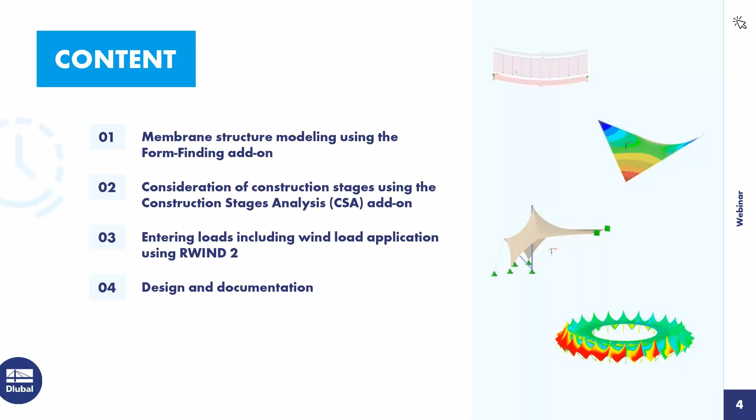Okay, thank you, Andreas. Then I take over and start with the technical part of our webinar. Today I want to show you how we can deal with membrane structures in our new generation, RFEM 6. For this we planned 4 main points we want to show you.

At first, of course, how you can model form-found shapes and work with them in the program. Then how we can organize these shapes to each other with stages. Third, how we can create wind loads according to CFD analysis on the structure. And finally, how you can design and document such type of structures.

Of course I can't do this completely for one project in an hour, but I want to give you an idea how this is working. You see on the right side some pictures from top to bottom.

Because the new generation has a new input concept for these tools, I want to explain this on an easy, simple example on a cable at first. Then we go to a hypersail surface structure, and afterwards we use all these functions I explained on a more complex structure, a stadium segment, and finally we take care of wind simulation on the complete stadium model, what you see on the bottom.

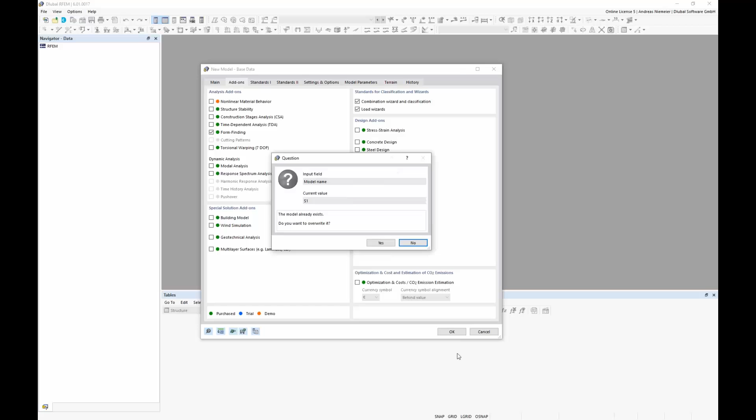For this first part, we define a new model and activate the so-called form finding tools in the add-ons catalog here. We want to overwrite, and as you can see if you go into the program, it looks generally like the past solution, but as you will see, we have some new changes here.

As mentioned, we will explain all new features on a small, easy example. I selected here a cable example, therefore let's model it. I use a new member type, cable, with a cable cross section.

Let's select one from the library, for example this PE cable with a PE material, cable material with the equivalent stiffness, and define here a cable with the length of 10 meters between 2 points. So that the cable will not fly through the air, of course we have to define some boundary conditions, therefore I define here 2 supports.

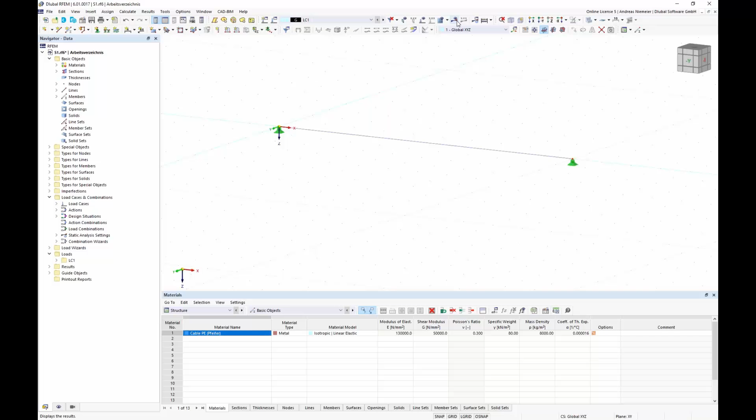Now this is the input for the model. As you see, a simple cable, and on this structure we explain now all features. And of course what I always do when I explain form finding, I calculate the deflection of this easy example. Let's calculate the self-weight load case, which is always defined automatically in our program.

If we run the analysis of this load case, we will get from the program, as expected, a deflection curve. Here you see 66 millimeters sag.

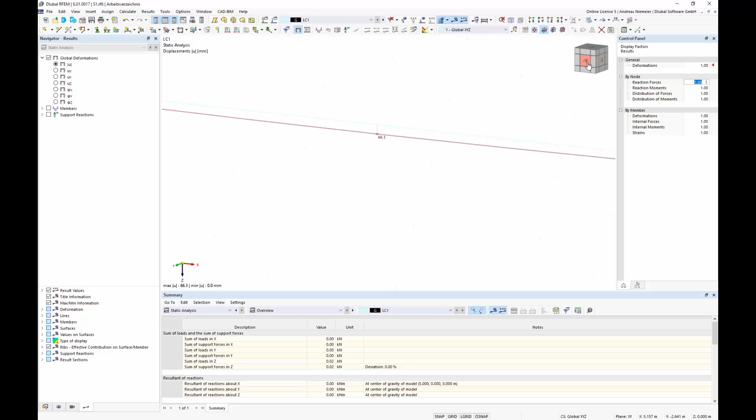Of course we can deform the sag manually, or let's say scale it. We can animate it, and when I scale it to 1, you will see that the deflection curve will lie on the topology shape.

And this is maybe the first point I want to mention. In our new generation we have programmed an intelligence that draws the topology, the cable structure in this case, on the deformed shape, in this case with a sag of 66 millimeters.

This you can change in the display navigator below the chapter model, display topology on original shape and deformed shape. The same you can change here with this button, original and deformed shape. So this is a little change that should help to understand the model a little bit better.

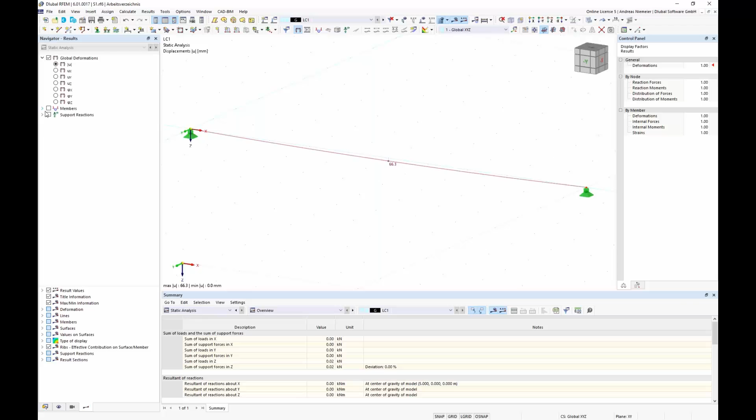So, next topic. Of course we calculated now the static analysis with the length of a cable of 10 meters and for the self-weight of the cable itself, which ended up in a 66 millimeter deflection with an internal force here of 0.33 kilonewtons. But of course it's a too small cable, moment.

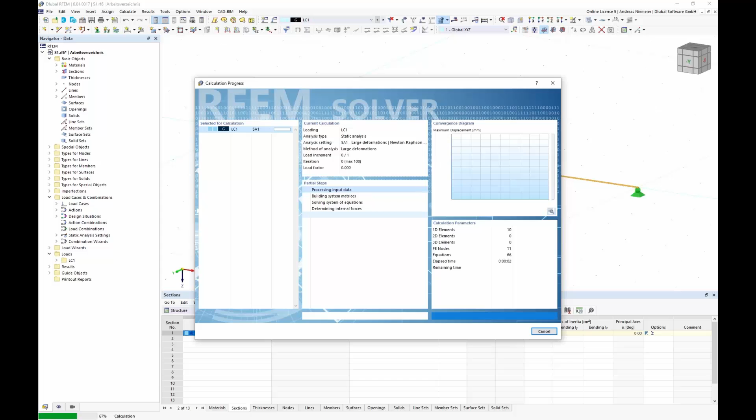Let's change it now, because to show you the effects I expect a bigger force here. Yes, 1.25. But of course if you see the force here, you could say I want to simulate in the program a cable with a longer length so that I can reduce the normal axial force here. And this is possible with our form finding application.

And for this you have to define now, besides the self-weight load case, a pre-stress load case. I call it P and define here an action category pre-stress. This is now the step in our form finding tools. And this pre-stress load case is now empty and should be filled with some boundary conditions. We can fill it with the boundary condition for form finding.

We can go to the member loads, to load type, form finding, and define here, for example, a geometric definition that we expect for a specific load a sag or a cable length of, let's say, 0.2 meters. And if we apply this load, you will see it looks like a line load, and it indicates that we get here 0.2 meter sag.

And of course everybody could think now, it's defined, and if I calculate this load case we get a sag of 0.2 meters, but we don't get it. We get a zero result for forces and a zero result for deflections. And this is clear because the program can't find a shape for a form finding condition, for an expected deflection, without knowing in which direction it should run. Should it be downwards, upwards, back, or in front? So it needs a load for which the shape is detected.

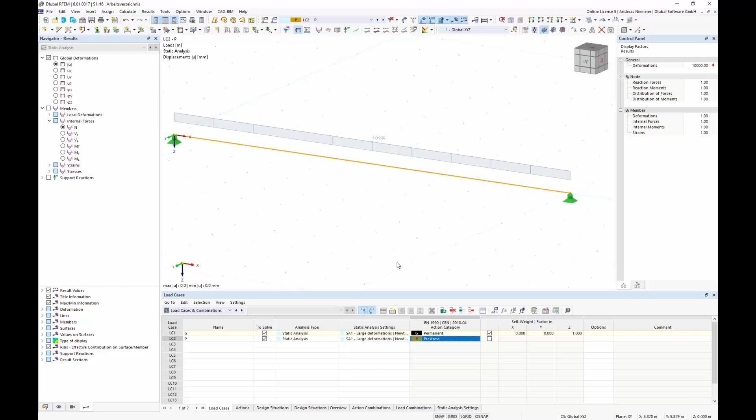And in this case, if I take a look at the load case list, we can say, please find me the shape with 20 centimeters for the self-weight, for example. It could be any other load also. For this, I have to go to the load combinations and define it. I deactivated first the wizard and go to the load combination and say, please combine form finding with self-weight. And this means for the program, because this combination 1 contains this form finding pre-stress load case and another load case, that this is a form finding job.

And if we run this analysis, the program searches a shape which fits the conditions. It means it searches a shape where it can almost fulfill this condition of 20 centimeters with a corresponding force. Of course, you see here we don't meet the target completely. We have here 213 millimeters and not 200, but this is a cause of accuracy. It's maybe the standard definition for a specific size of model. If you want a more certain result, you can change the properties of the calculation.

This leads me to the next feature, how this is organized in RFEM 6. We change to the properties, and you saw we calculated CO1, and every load situation, load combinations and load cases, have here a static analysis setting. That means I can assign to every analysis or load situation a set of calculation parameters. And these calculation parameters have also a form finding sheet where I can define these settings. You see there are fewer inputs.

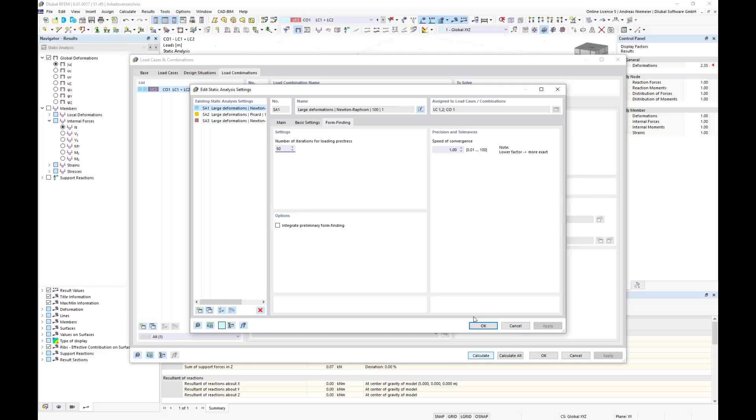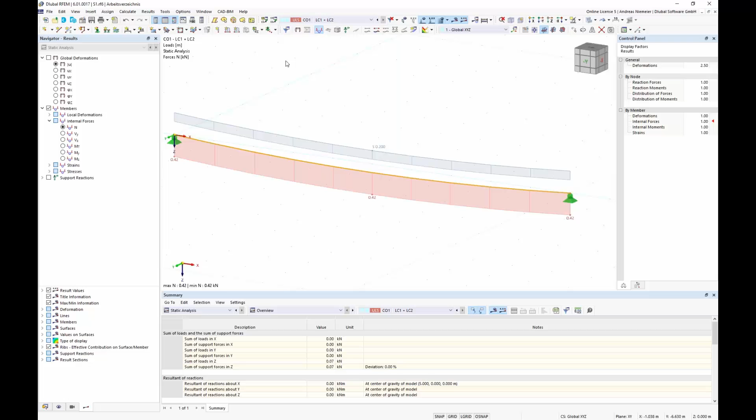We simplified everything a little bit, and I increase now the pre-stress loadings to 50, and after confirmation and rerun we will get the 20 centimeters hopefully, and yes, we get it. So you see the program found the shape with 20 centimeters with a corresponding force of 0.4 kilonewtons. So far this was our first form finding job in RFEM 6, and maybe you saw now that we gave you as users a new mighty power in the program to work with shapes.

In difference to our old solution, we can now manage more shapes in one model because I have it now in hand of combination. Before it was only one. And this means now, if you imagine, this is now shape 1, form finding 1 is G plus P, and you say, I want to check in my model also another shape. Maybe the shape should base on a punctual load in the middle.

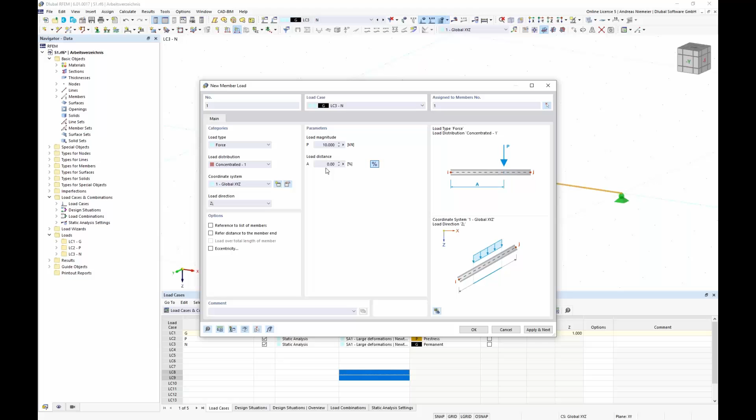So let's define here a load. For example, I call it N, and give this load case maybe the type permanent. Nope. And define in the middle here, let's say a concentrated load with the size of 10 kilonewton in the middle of the beam, and place it here exactly. And now let's create a second parallel shape besides this self-weight based shape.

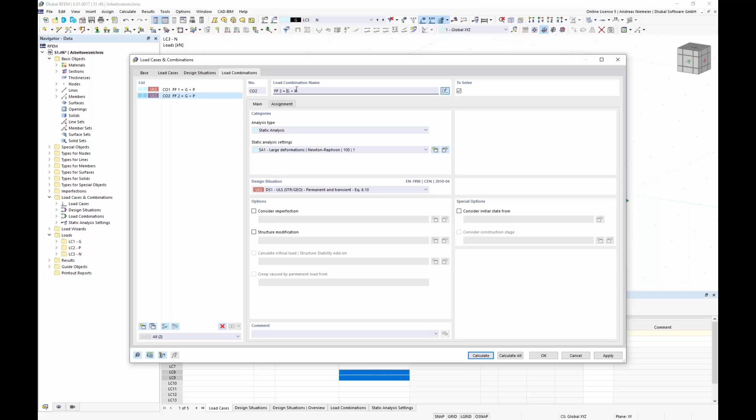So I go again into this load case and combinations dialog, into load combinations, and create here now a shape maybe FF2, based on N plus P. And for this, we only have to change here the input, so P and N in difference to the first one. And if we calculate this, you will see you can do in the same model another

shape. What means we have the 200 millimeters in the middle, but if we take a closer look, you see according to this form finding load in the middle, this concentrated one, we get such a triangle shape with a corresponding force. And you can change in between both shapes. So this is now possible and gives you much more options to check your models or to create something new. So this is one point what I want to show you.

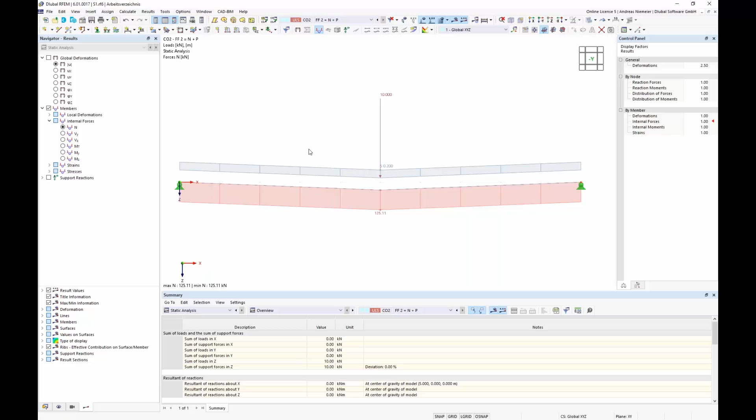So the next point was, and I remember too many questions on the support, how I can deal with partial safety factors in the program. Do you have a solution for it? And with the new generation, we want to give you a solution. So I can say, of course, we can create a third shape. For example, I copy the first one and say, let's scale it up and define here 1.35 as factor.

And that we have a clear name, 1.35G plus P. And if we calculate this, the program knows I have to do a form finding with the form finding condition of 20 centimeters. It was not scaled up, but with a bigger self-weight load scaled with 1.35, therefore we get a little bigger force on the cable, not 0.4 and 0.56. And you see the program is ready for this.

Of course, we can also, let's say, scale the pre-stress. What means if I scale the pre-stress 1.35 and only for the name here 1.35 FF4, for example. This was FF3, only that we have a clear description, and calculate. Then we can also scale the form finding inputs. You see, not 200 and 270. What is the factor 1.35 in between with the corresponding force again. So it's an easy game to work with different shapes in one program now. And this brings me to the next topic.

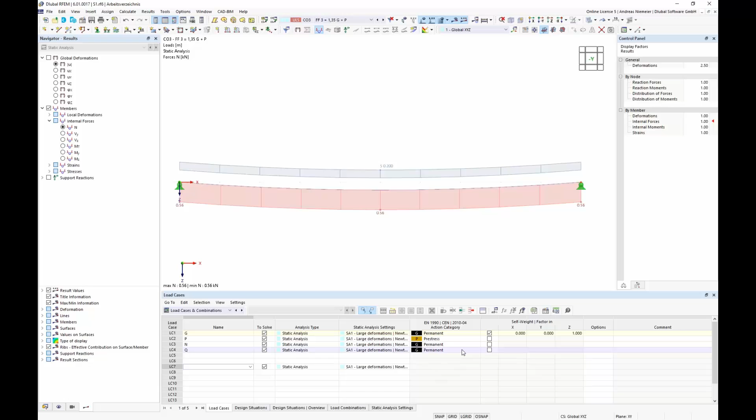What happens if you want to use these defined shapes for further loadings, maybe surface weight, snow, whatever. And here it's interesting, you have to organize now which shape should be used for which load case. So define at first some additional load. I define here, for example, a variable load with any category. Let's take, for example, this red one. Nope. Now, apply, for example, 5 kilonewton per meter on the structure here with a projected load.

So far we have a load on structure. If I run this load, what happens? Without any further specification, the program applies this load on the 10 meter long cable, and not in any shape. But if you want to apply it maybe on shape 1, you have to assign it. This means we go again into this dialog, load combinations, and say, please calculate, we give a name, Q on FF1. And this you can do if you define an initial condition or an initial state. So here you specify the shape, for example shape 1.

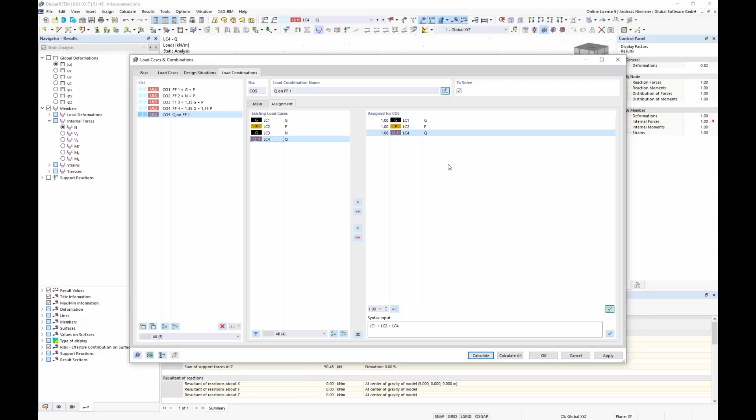This means we overtake the geometry of mesh and the inner forces, and to get a full set of calculation we apply also the outer loads, form finding loads and the expected, let's say, additional load. And now, according to the situation that we have here defined an initial state as starting shape, the program knows that this is no form finding job and only a pure static analysis job. And let's calculate this and take a look how this is looking. And you see, when we take a look on deflection, we have now deflection of 629 millimeters, and this means this starting from the original shape.

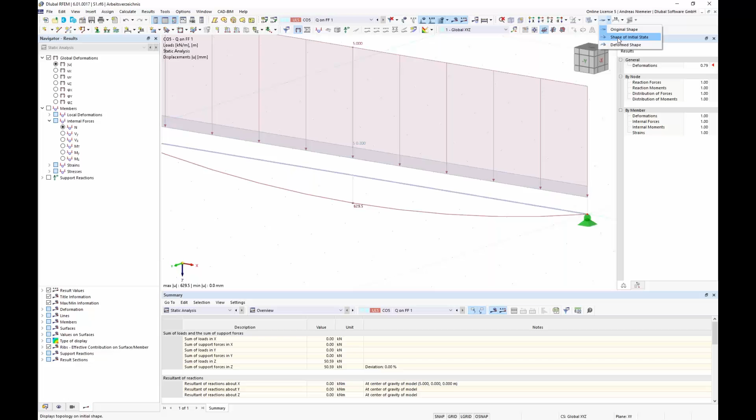So this is what we inputted. This is the shape of the initial state. This is our form finding shape, and this deformed shape is the loaded form finding shape. So the program gives you the option to manage all this stuff, and of course not only for one shape,

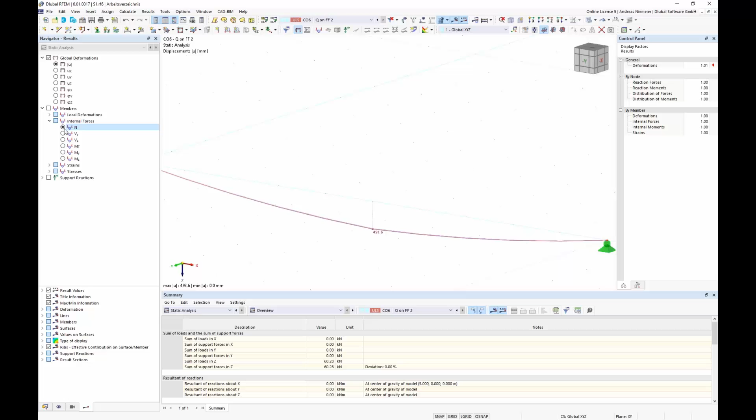and if you wish you can also apply the same load on shape 2, which means we only change here to shape 2 and exchange here the load. And with calculation we get the same task, only on, let's say here, original form finding shape 2 plus load, on a deformed shape with 493 millimeters with a normal axial force of 177. So this is, let's say, our new philosophy of working with form finding tasks and organizing it in the program.

And this brings me to the next point, how we recommend the standard use of these tools. If you are starting with a new project, of course you don't want to test it like I just showed you. On a real project, I recommend, and for this we create here a new situation. So I delete all this stuff, go back to load cases, and maybe let's remove this stuff.

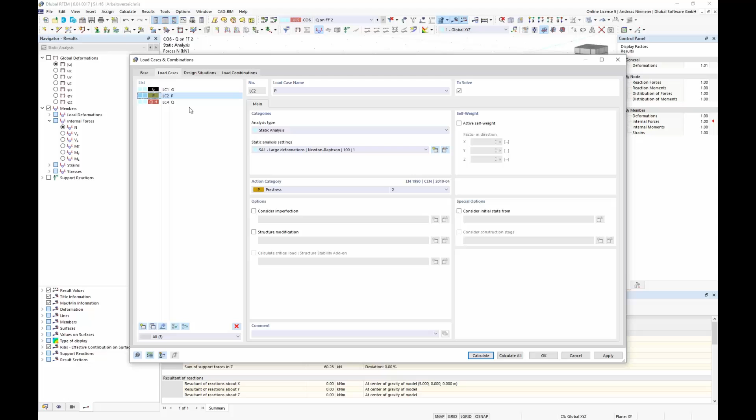And now we have these 3 load cases, a standard situation, and in a standard situation I recommend that you use the combination wizard and say please combine all these load combinations automatically. This means the program takes over all this stuff, but it has to know what is my shape. And to define the shape for the program, we create it here as an individual load case.

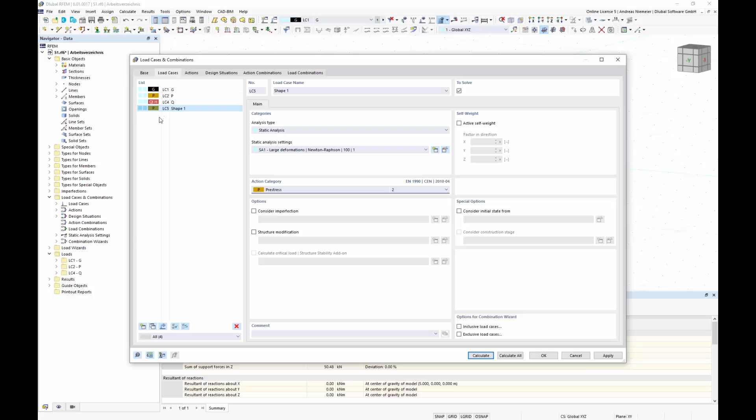So we select both, for example P and G, add it, and say this load case is shape 1. And now we give this shape 1 the pre-stress load case. Now you see we have 2 pre-stresses in it, and we only have to use 1. So I teach my action set, pre-stress, that this is the shape, it's not needed, we only want to have a

combination with P, and go to the design situations and tell our combination wizard, if you combine something, please always consider shape 1 or any other shape. Of course we have to use Newton-Raphson here.

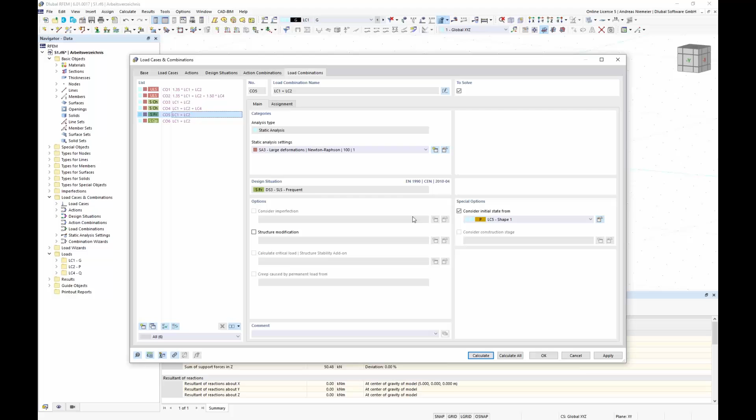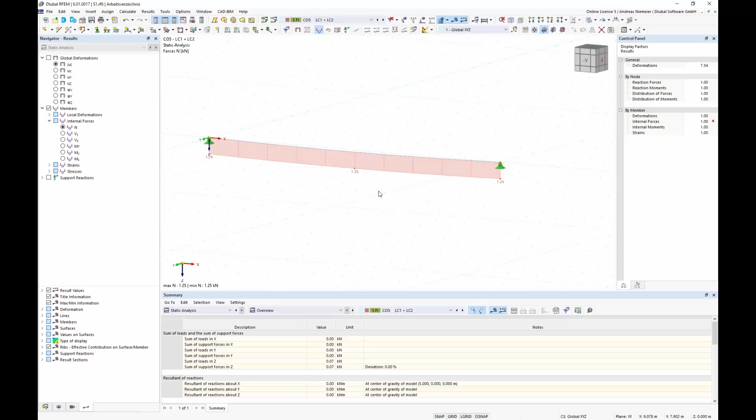So now if we go to load combinations, you will see the program combines all combinations for us according to the rules of standards, so ULS and SLS with factors, without factors, and you see in all combinations shape 1 is automatically assigned, and all the external load cases are also placed in the combinations. And with calculate all, you get all forces that are expected in this case. First it calculates the shapes and then it sets them up.

So this is maybe the first introduction example that shows you how to work with all these tools in RFEM 6. Of course this is a special example because the shape for cables always depends on the form finding condition, so how big is the sag, for example, plus any load for which we have to detect the shape, the self-weight, for example. But there exist different examples.

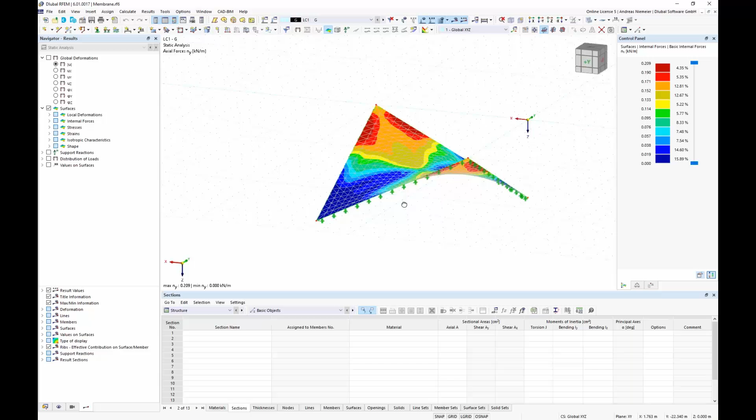Maybe the next is here on the desktop, a surface structure, a membrane structure. And I prepared this example only to show you it could also work like this. So in this case we have such a sail with typical load cases, self-weight, pre-stress and snow load. Self-weight, clearly, is the weight coming from the material itself.

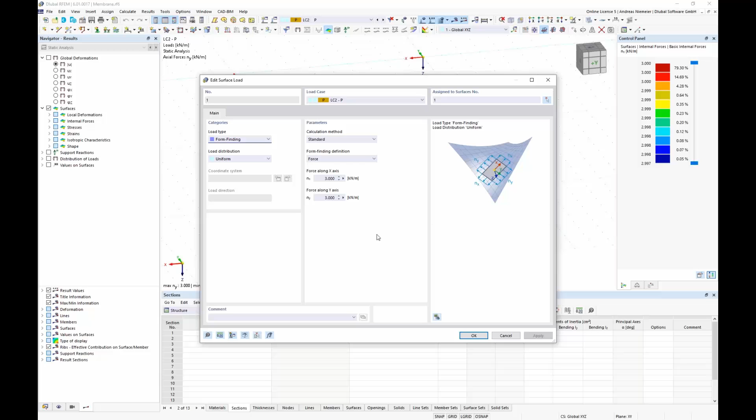For pre-stress, we defined here, you see, the inner pre-stress, the membrane tension, by a surface load, like we just did for members, with load type form finding, and defined here in X and in Y 3 kilonewtons per meter. And you see if you run this form finding job, you get the shape of the membrane, and you get internal forces in the membrane that almost meet the defined 3 kilonewtons.

And if you want to combine all these 3 load cases in combinations as the standard recommendation, you go into the load case and combination menu, define the combination wizard setting, which is on by default, and teach the wizard: please always assign the initial state, the shape from load case 2. Nothing more. In this case, it's enough.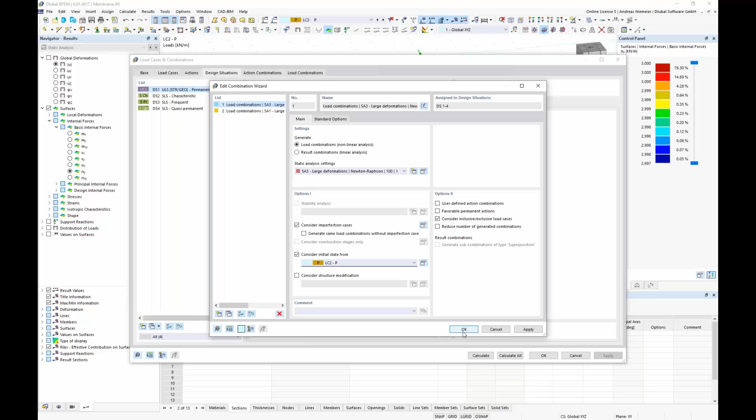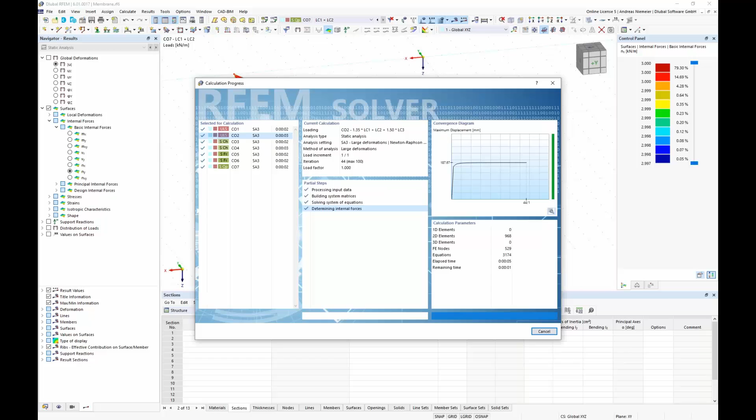And if we go to load combinations, you see the program assigns even for this surface structure this shape from load case 2. And if we run the analysis, the program uses this shape and determines the forces. As you see, now if we go to the characteristic solution, we have here shape plus self-weight.

It's now almost 3 because self-weight is applied afterwards, and if we apply maybe even the snow load, you see the forces have bigger changes because the load has effect on the given shape. So even this type of model is possible in the new environment.

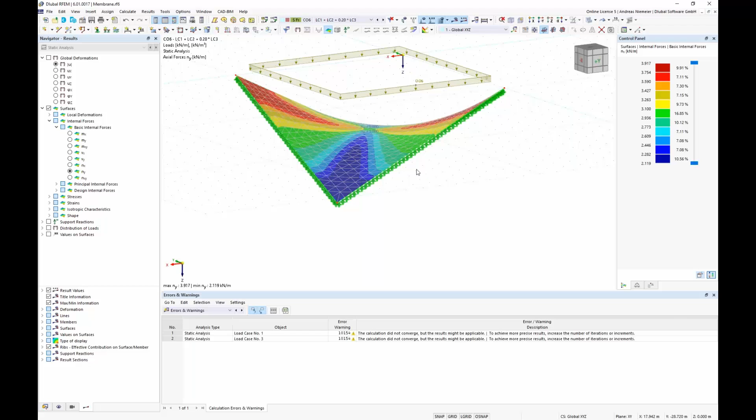And now we learned that we can use pre-stress load cases with form finding loads to find shapes, to organize shapes, to assign shapes to load situations. I want to go the next step and say it's even possible to use shapes based on other shapes. And if you have such a task, then you can also use RFEM 6 for it.

And I prepared for this type of analysis a special picture to explain to you what we want to do. You see now here 2 pictures on top, a ring segment, a 15-degree segment of this stadium below. This consists of a primary and a secondary structure. The primary structure is this column with this bracing in back, with these stay cables and these tension cables with this inner ring.

And if this primary structure is set up, the work is coming and hanging in the membrane. And this is the secondary structure. This demands that you have shape 1 for this member structure and shape 2 for this membrane structure, and both could be managed. We take a look at this now. We model this part, and afterwards we go into the stadium structure.

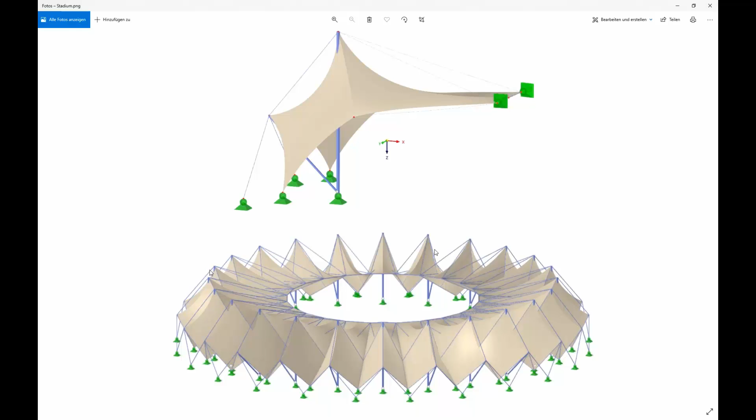So let's go back to RFEM. Open a new model, I call it S2, and define all tasks needed for modeling this part of the stadium. I go to add-ons and say, please use form finding. And because we have these different stages, primary and secondary, I activate construction stages and go in. Of course it exists, so override it.

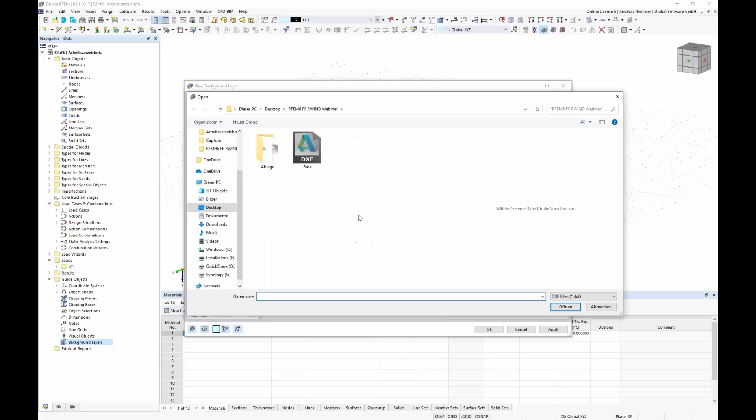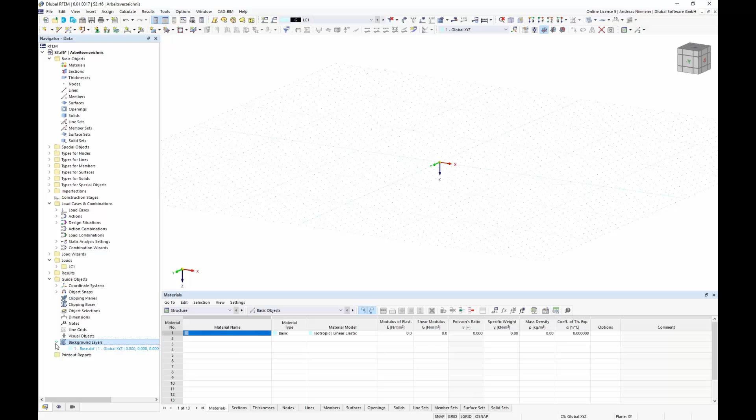And now let's start. Of course it's not easy to model a whole stadium or a fragment of it, so I prepared a DXF background layer. I go to background layers and import a layer from a DXF file called base. You see this is my DXF data. It's on the wrong plane, so I rotate it 90 degrees and then by 180, and then everything fits and we can take it over. Please take care that it's activated.

Now we have this basic geometry in our program. You see on the bottom there's a tribune only for imagination, and then these main elements for the primary structure, and then the membrane for the secondary structure. At first we model the primary, take a look, and then we add the secondary part. So let's start modeling these members.

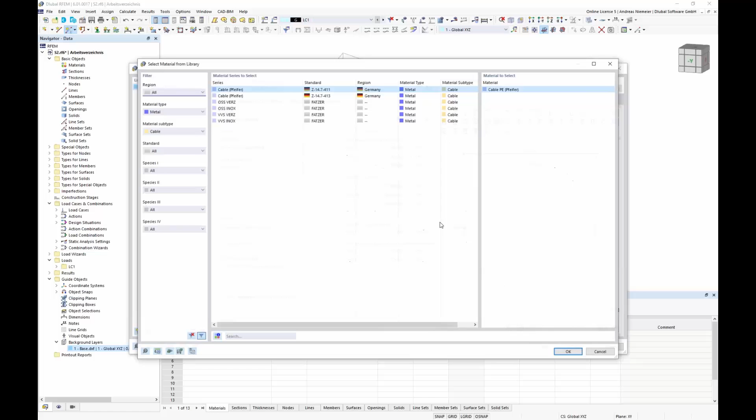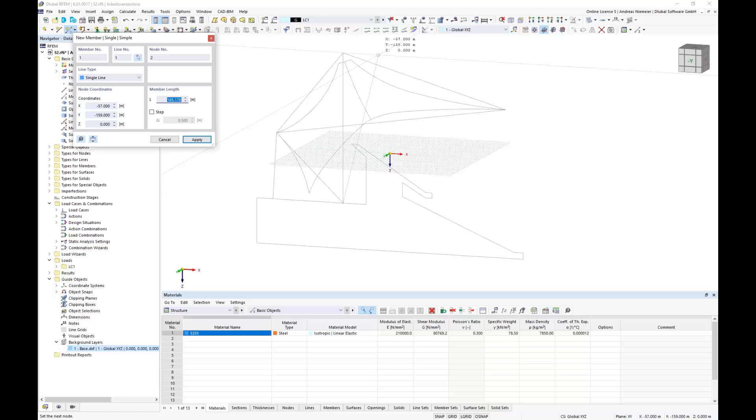I go to the member dialog, member type beam. Let's select a section. Here I would select a diameter of, for example, 1000 millimeters with a thickness of 10, and a material of S355. So let's go to steel according to Eurocode, select the standard, select the steel here and go. And now we can place this column in the structure, from the bottom to the top.

Let's add a bracing member that is hinged at the bottom, so I activate the hinges, and here we have a different cross section, for example a 600 millimeter diameter with a thickness of 10. Of course this could be optimized according to the section proof afterwards. The hinges should be at the bottom, so define hinges about Y and Z, and now we can place the member between these 2 points.

This structure will not be stable, so we have to use stay cables on it. The stay cables act on the outer part of this segment. At the moment it's only a slice, but it will be a 15-degree segment, so we have to create it. For this we need a center point of our structure. Because I know the diameter of the structure is 288 meters, I copy this node 144 meters to the middle.

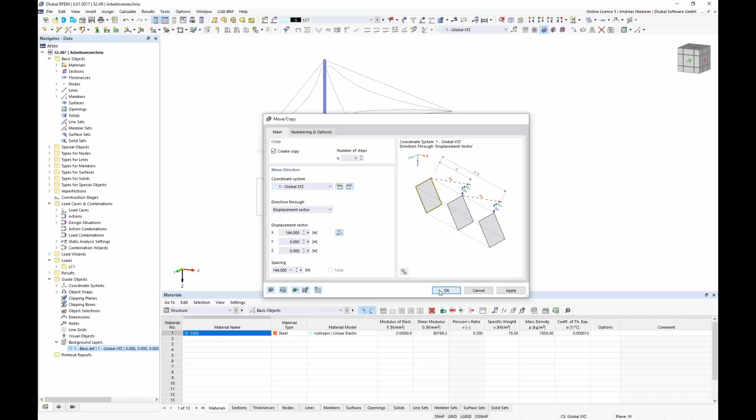This is now my center for all rotations, and we can create from these nodes the outer points for this segment. I select these 3 nodes, rotate them by 7.5 degrees about the global z-axis around this point, apply, and now minus 15 degrees and OK. So now we get these outer nodes. In a top view, you see this is the geometry of this 15-degree segment. Now we can place the cables, after deleting the uninteresting nodes.

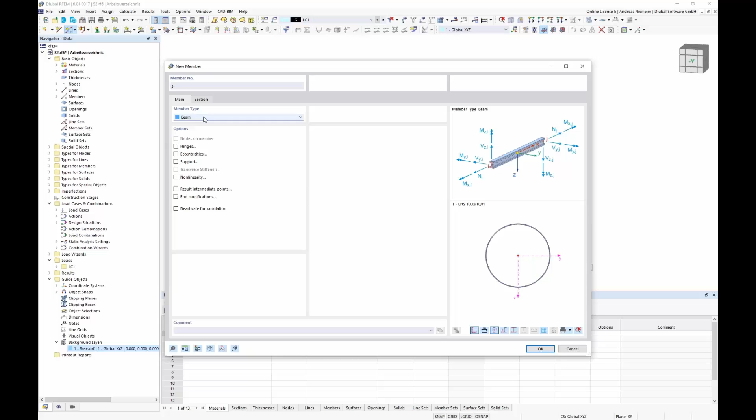Yes, and go to the new member function, use a cable, and now select equivalent sections with an equivalent stiffness. For example, here a solid section with a diameter of 80. So now we can place it here and here, and now to the top.

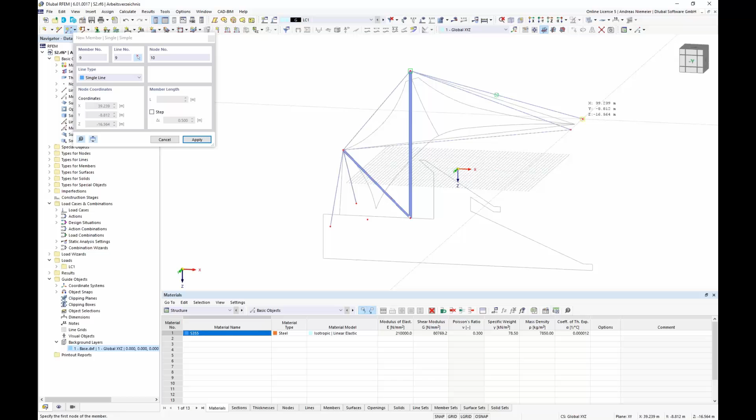And now we need maybe some suspension cables to the front. Here we have a different diameter, so it's a cable at least. We use here a solid section again with a 30 millimeter diameter, and then we can connect maybe the peak point or top point with the front points, and maybe make some stabilizing cables back to the back bracing.

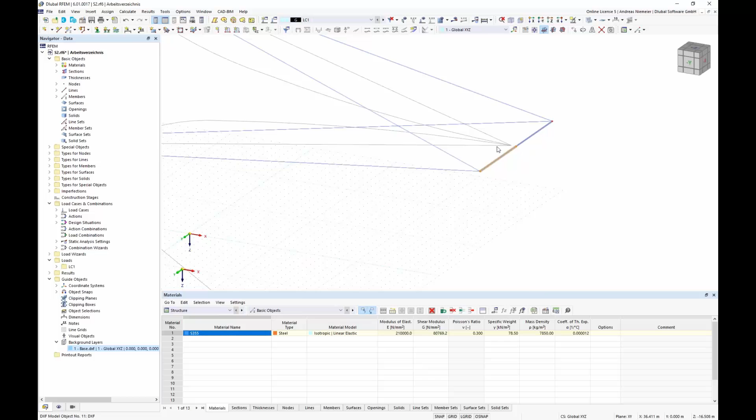So this is almost the primary structure for the stadium segment. The only thing that is missing is the tension ring around the structure. Let's add it. We take here a cable with a section, and maybe here we need some more mass, for example 120 as equivalent section, and connect both points and directly define here a middle point, so divide member for a later connection of the ridge cable. So this is now everything that I have to define for members for the primary state.

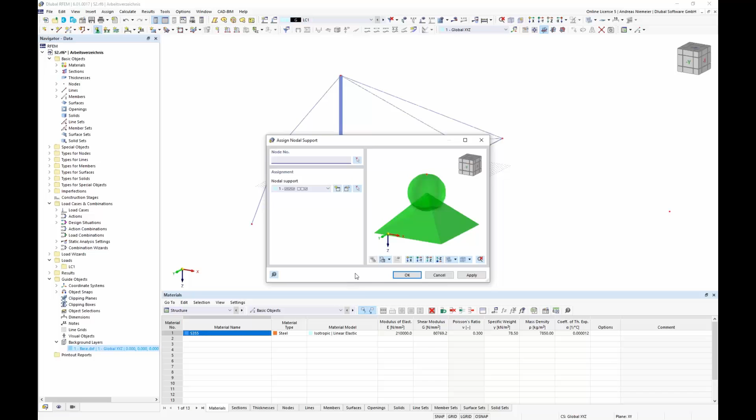So I deactivate the DXF, so that you see what is left, and now we have to define the boundary conditions. And boundary conditions are, let's say, the easiest one are supports. So we define here a fixation, fixation, fixation, and of course this front point is not weak. We need a rotational symmetric boundary condition so that this is overtaking loads. So I have to simulate this tension ring around.

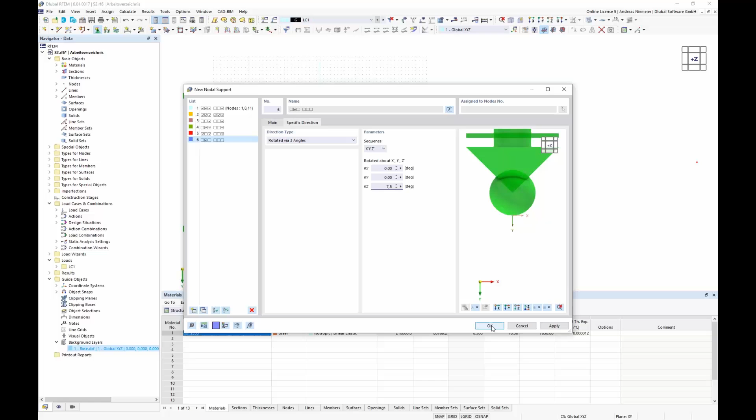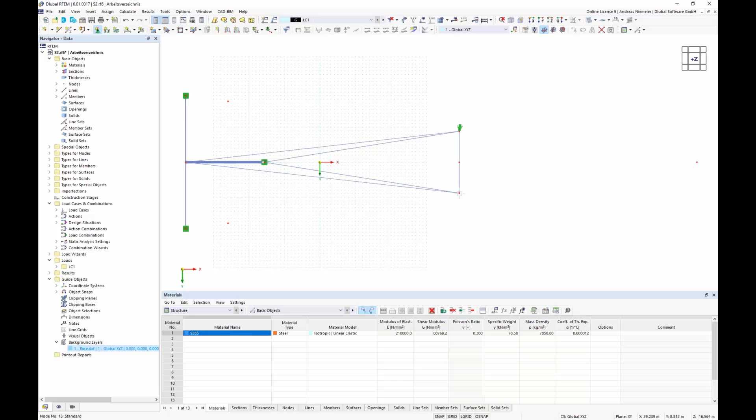For this I use also nodal supports, but I rotate it in running direction of the cable, which means I fixate the degree of freedom in UY direction with a specific direction around 7.5 degrees. Okay. Yes, and now let's copy it so that we have it also for the other direction with -7.5. And now we can start applying this support here, and the same, the last for this direction, and we get a structure that can simulate this tension ring.

So the structure itself is now ready. The only thing that is missing is the form finding conditions to find the right shape for this structure. And if we want to do something with form finding, we learned already we need a load case pre-stress. So this is G, permanent load case, and here we need a load case P, pre-stress, for defining these form finding conditions. So let's do it like this.

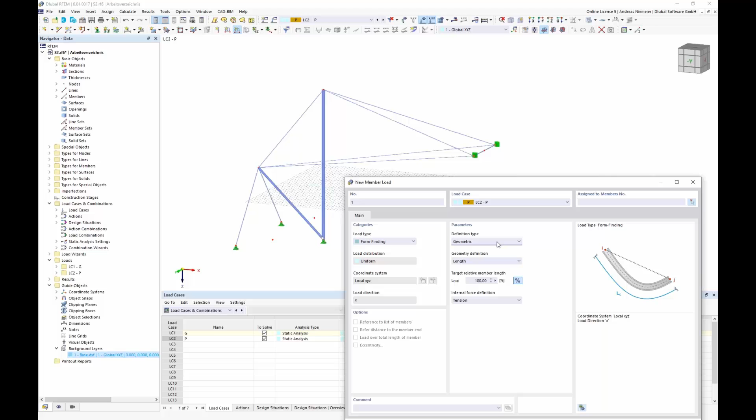This entry is done, and define here with member loads, type form finding, geometric definition. So you see we have here different options. We have geometric definition, we have force condition, but in our case in this type I would say generally it should find a shape with the original length of the cable. So I define geometric length by 100% and apply this on all cables.

Okay, so now it's done, and now we should do a combination of both loads because we have to find the shape according to the self weight, which is clear. We did this before with a load combination, but now we expect that we have a shape on another shape, so we have to organize shapes before, which we can do in the construction stages.

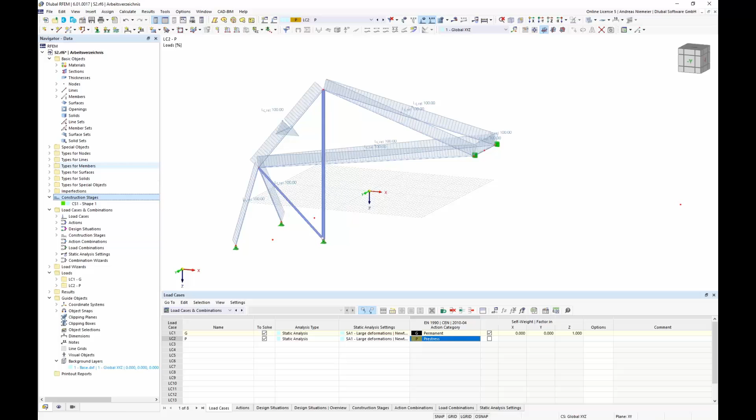In the construction stages we can define now a stage, primary, or not primary, let's say shape 1, it's easier to understand, and we say shape 1 consists of members and nodal supports, and the members, I draw a window around everything, okay, and the nodal supports the same. Everything good so far. Okay, so the amount of elements is clarified in this stage, and the only thing that is missing is that the program knows now it should do a form finding for this stage shape 1. Which means it should consider these load cases as permanent.

And if we calculate this stage with this load selection, it's clear because nothing else is here, it can do a form finding for this type of structure. We get small sags, we get forces, so everything is clear so far.

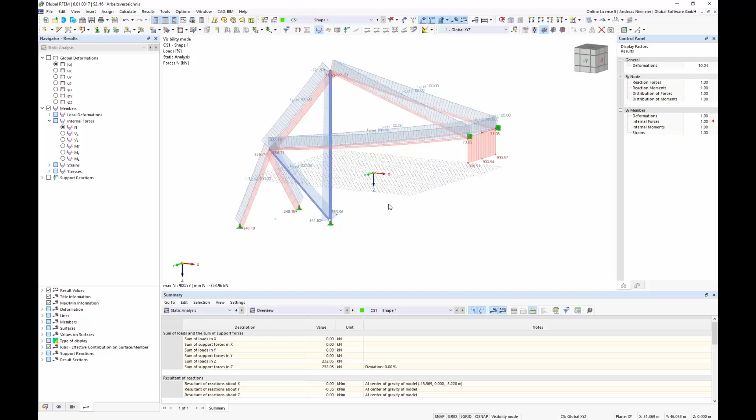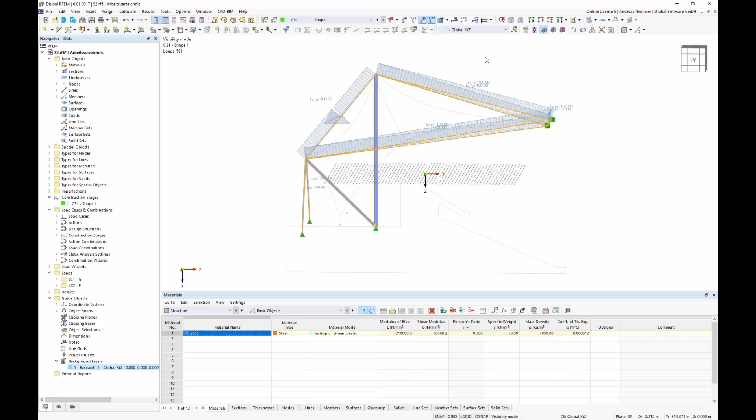The next point is to hang in the membrane, which I mentioned before. So if we take a look at the background layer and set it here, you see now we have to bring in the membrane on the already deflected and loaded shape 1. To do this, let's delete the mesh and start modeling the rest. That means we define, for example, the boundaries of the membrane.

It's maybe here, running to this point, and even from here to the top. The only problem is now that I have to specify that the cable is not running in the other one, so I rotate my grid point plane and use some arc lines to cover this.

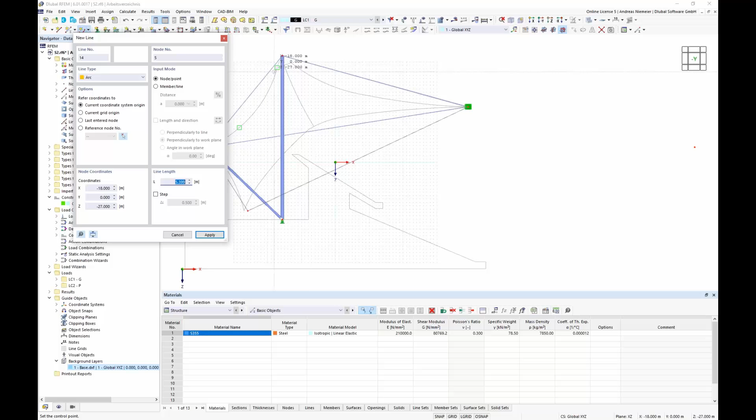I simplify this right now for the presentation and pick here the line, the same for this here. It's not important if this line matches the DXF shape, because the form finding application itself will find the right place of the structure. So it's not a target, it's only a tendency of where it should go.

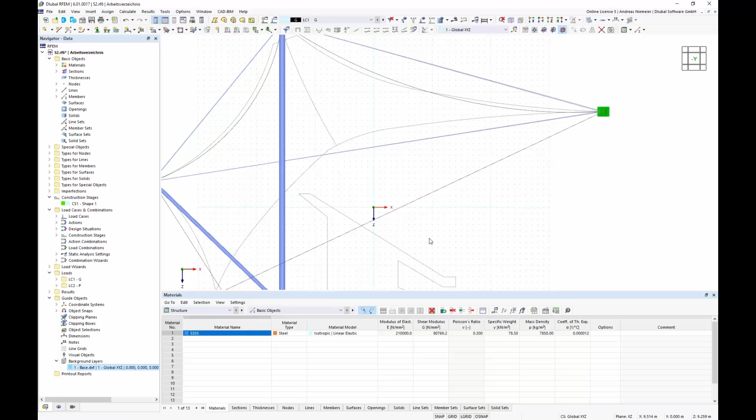Now we can, not completely, we need here a splice cable, so also define here a splice. And if we want to define it on the perpendicular point, we can do like this. Now we can deactivate this shape.

You see we specified the boundaries for the membrane and can support now cables on these boundaries. So I select all these lines, go into the library, edit lines, and say these lines should hold some members with the type cable, and now define the last section, for example one with 20 millimeters. So far it's good, and now we can bring in some membranes in these cable boundaries.

Because this produces some not-plane surfaces, I select as initial shape a quadrangular surface with the type membrane and go to the library. This is maybe new: in the library we now defined fabric material, standard materials with an average set of values of stiffness. For example, we use here the glass PTFE type 3 option.

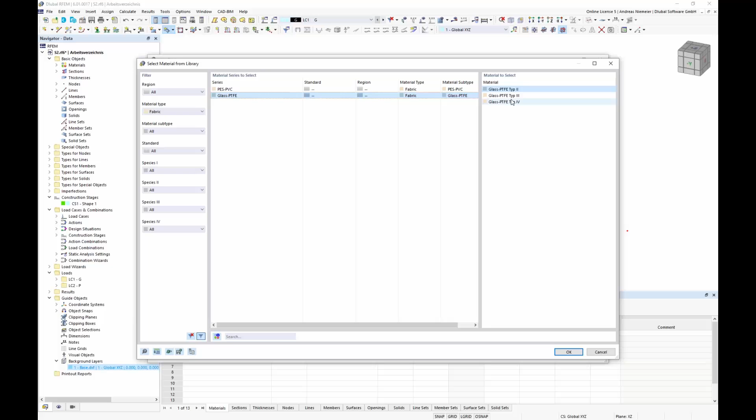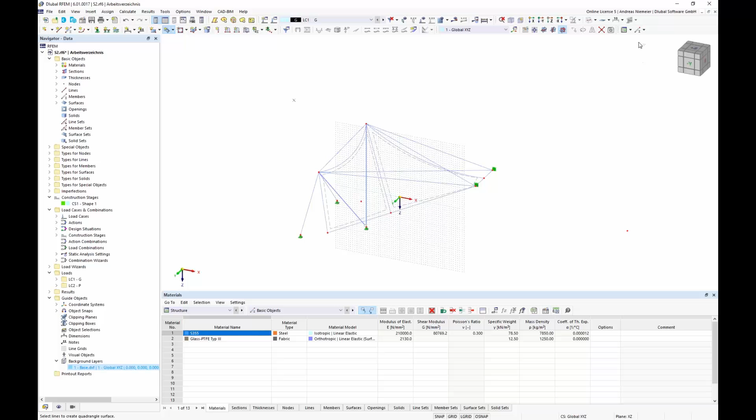The program knows, according to defined stiffnesses, even the reference thickness of 1 millimeter here, and now we can place these surfaces in between these cable boundaries. If we take a look at the transparent view, you see the definition is now made, and now we only have to mirror this stuff on the other side. So use the mirror function, create a copy about the XZ plane in the middle, and go.

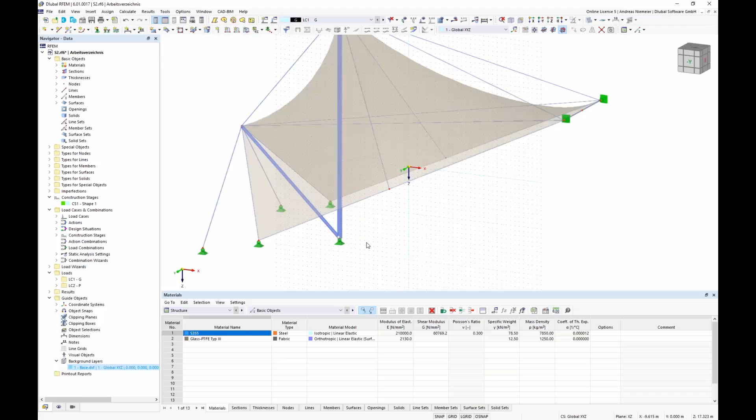So all this is done, and now to finalize all this stuff, we have to take care again about boundaries. One type of boundary is clear: we have to fixate these lower corners here, and we still have to check that the rotational symmetric support is working for this 15-degree segment. This means we have to support these boundary lines.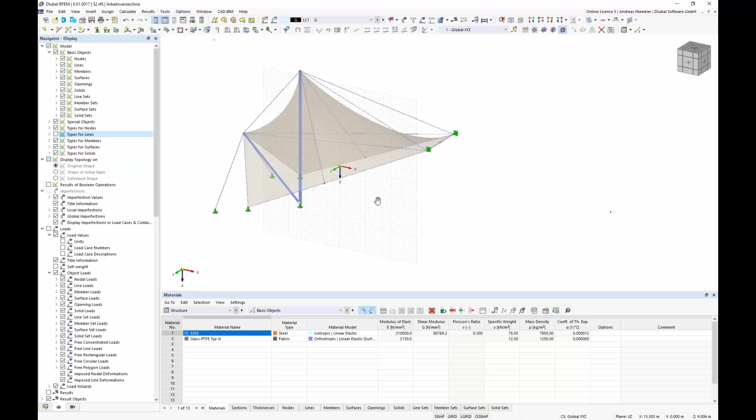So we use here line support on local axis in local y direction and pick these lines here. So far this is done. This is a fat green line, and I don't like to see it all the time, so I deactivate it here with type for lines in the display navigator. Now the last point is to specify even form finding topics.

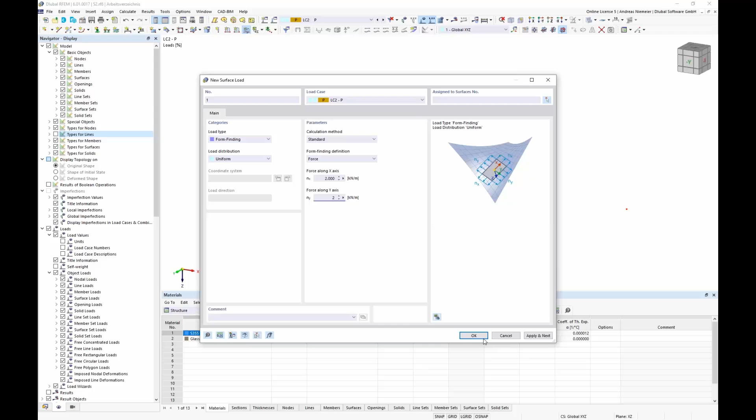So we want to pre-stress the membrane with a tension load. Let's go to surface load, type form finding, and we can define the method of application, standard or projection, force or stress, and we say, for example, we have 2 kilonewton in x and y direction, and draw it above the model.

So this is done, and now only the last final boundary cables are missing, and now I see so many loads and I lost my overview. If you have the same situation, please go to visibilities, generated members by section, and activate the last one, and you see these members are left.

We can go to member load, form finding, and select the definition. Geometric you already saw, but we have also force options, and here you get some more options for shapes. In RFEM 6 you now have the option to place an average force, maximum force, minimum force on member, horizontal tension component, a tension at start, at end, a minimum tension at start and end, force density. So there are more options than in the old program.

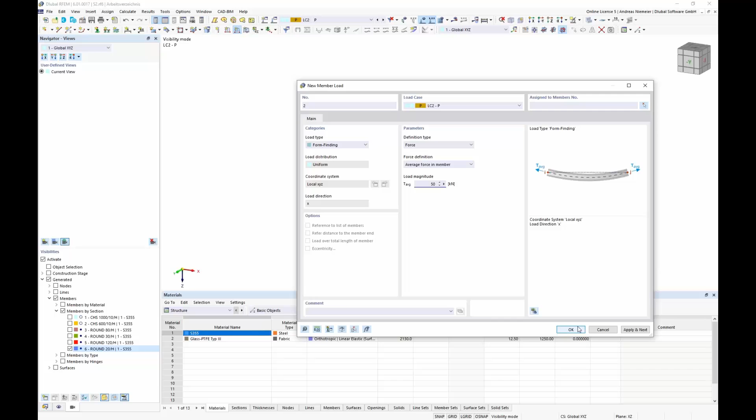We use now average force with, for example, 50 kilonewtons, and draw this stuff over the structure, and you see the loads are set. So now loads are defined, boundaries are defined.

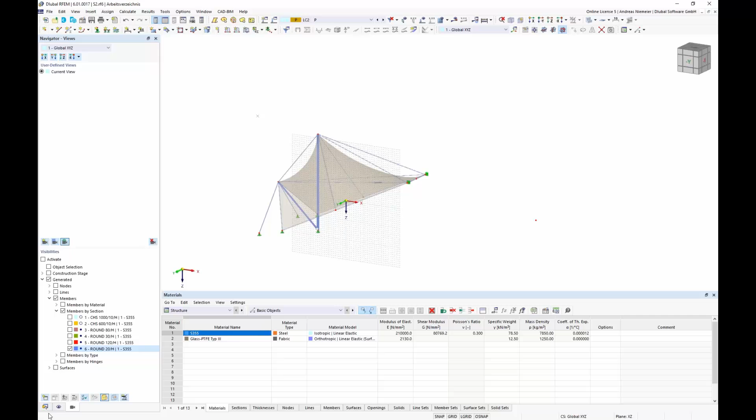The only thing missing now is that the program doesn't know what is my secondary state. So let's specify it in the stages and say, please create a new stage, and we call it shape 2 on shape 1. And for this we say, okay, please consider also surfaces, please consider also line supports, and because we know no more elements will come, we say all. So elements are clear.

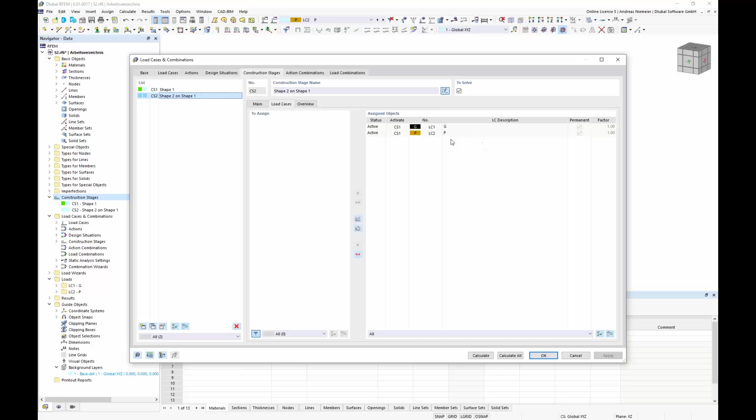So here we know which elements should be considered, and the program knows the loads automatically because stage 1 consists of self weight and pre-stress, so it's a form finding topic because it's permanent. The same applies for the second stage because it's also permanent. So if we calculate stage 2 now, the program first has to detect stage 1 because it's the basis, and once we have stage 1, it calculates stage 2. So we have a sequence of shapes.

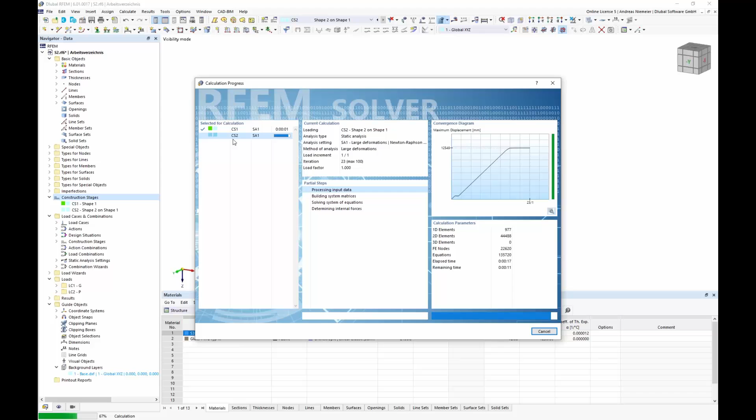This is a quite cool function, I would say, and gives us a lot more potential to calculate a lot of structures. Now when the update is ready, we have the shape of the membrane based on the already defined shape 1 with a new set of forces. You can see the forces in the membrane, forces in cables, and you can change back even to stage 1 which holds only the member structures, and get only forces on these elements and not more. So there's a pure organization of which element should be considered and which load should be considered, and RFEM 6 keeps it open for your definition.

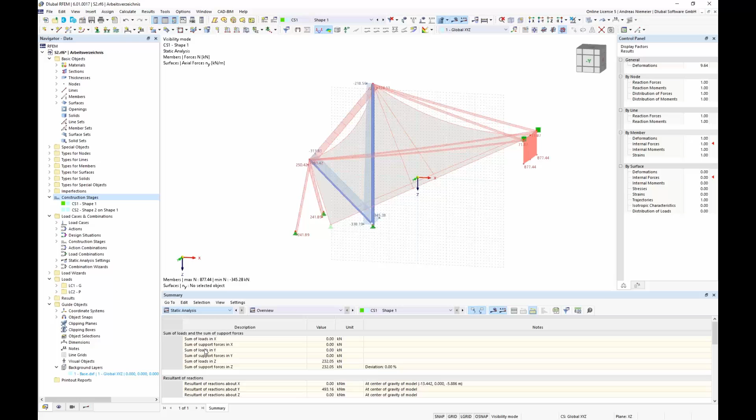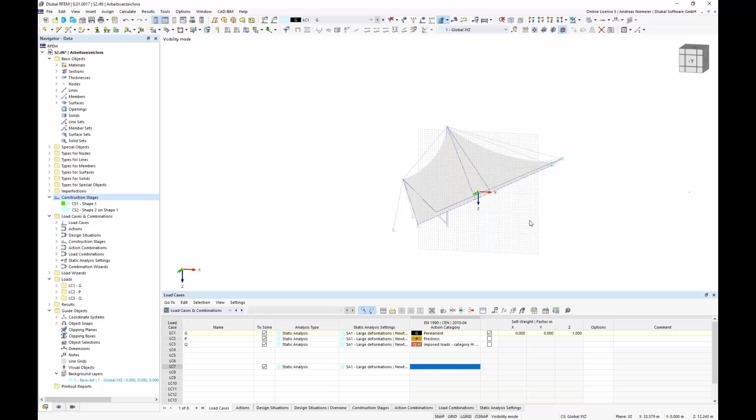Now if we have a sequence of shapes, the question comes up: where do I apply my additional loads? Is there not a weird situation, a chaos? No, there isn't. So let's create a live load, and define it in the load list, for example a Q load, where we say maybe this red one, and we apply it on the surfaces. So a surface load, force in projected area, maybe 0.2 kilonewtons, and we draw it over the structure, and you see it applies the load above.

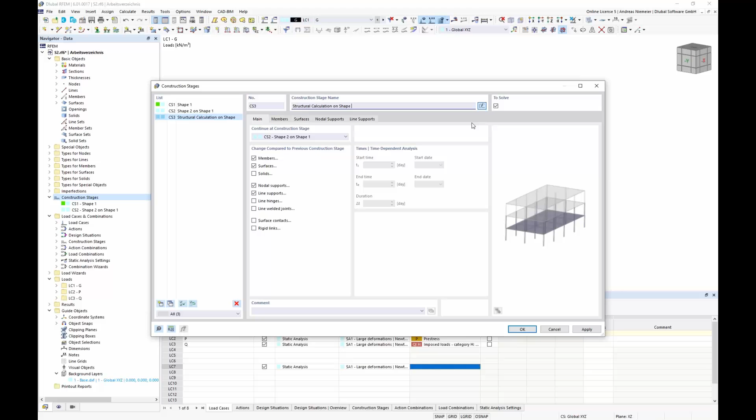The only question now is at which stage this load should be used, and we have to go back to the load combination menu to these stages and say, we have to do something first. We have to give the program information about what is now the basis for further calculation, and for this we have to create a final stage, which we call structural calculation, on shape 2. For this we can now start assigning loads. This means shape 1 has a start condition, shape 2 is based on shape 1, and stage 3 is based on shape 2.

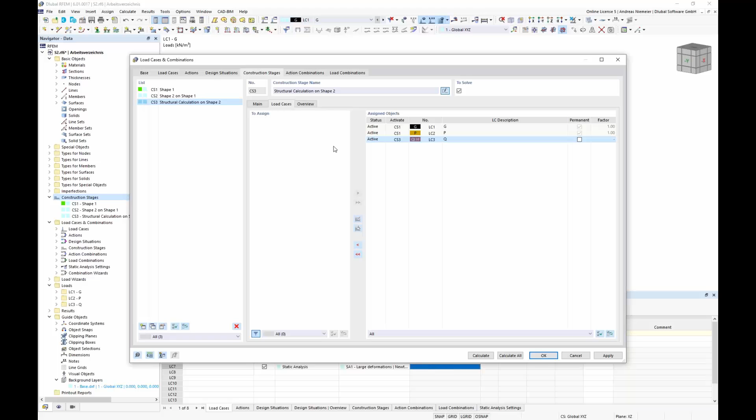And here we can say, please consider load case 3, variable non-permanent, in your stage. Now let's say everything is done for calculation, and let's pick load combination setup. What happens is the program prepares load combinations for ultimate limit state and serviceability. But if you take a closer look, the initial conditions, initial states are not defined. So this is not so good, but it's the same as for load cases - the program has to know for which stage.

So let's go back and say, of course we want combinations for all stages. The wizard says yes, I'll do it for stages only with the Newton-Raphson solver. If we go back to load combinations, you see the list is a little longer, but now has a stage allocation: stage 1, stage 2, stage 3. Here we have 2 combinations, the same for the characteristic ones. And as you see, we have now defined stage 2 as the basis, working on the element set of stage 3, so even this setting is pre-filled with all load cases.

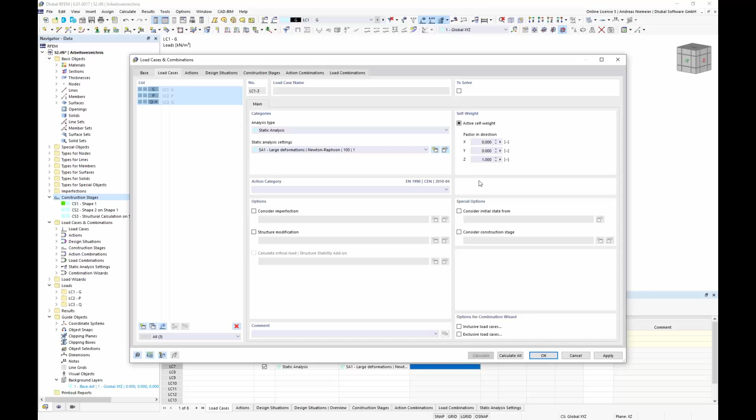Now we can start calculating all. Before that, let's deactivate these load cases so we don't have to wait for all of them, and simplify it a little bit. No, actually we can calculate all. So now the program is calculating all stages at once - or rather, the program always calculates the load combinations for the stages that are already calculated. So it can't calculate the final combination which is based on a state that isn't prepared yet.

So now we have to wait to get the analysis of these 14 load situations based on different statical systems. As you see, there are always 4 processes running on my computer at the same time. This is connected to a solver manager, because the program has the intelligence to detect how many processors are available and shares all this calculation task across these processors to get results back, using the complete available hardware where possible. Of course, it cannot skip ahead over stages in this case.

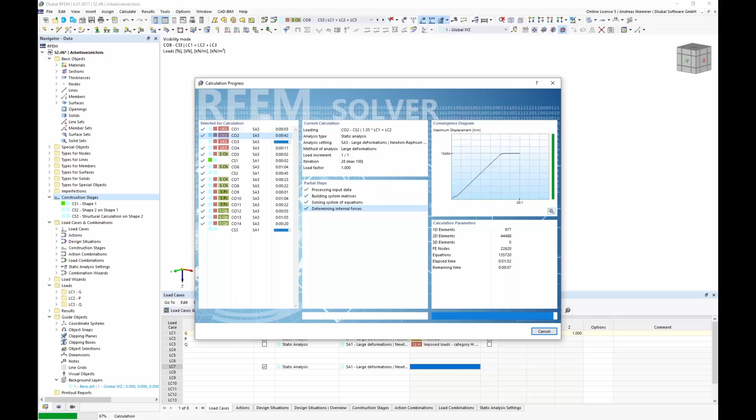You also can see, you can select here even every process manually. Maybe combination 1 has a pretty small deflection, combination 2 has a bigger one because the membrane is moving from its origin place to the uplifted place, which is a longer way in space to go.

So now results are ready. You see maybe nothing according to so many loads, but what is clear, let's open combination 3, what is here self-weight and pre-stress in these different shapes. This is maybe a little bit scaled, but now you can select the different stages with the different situations.

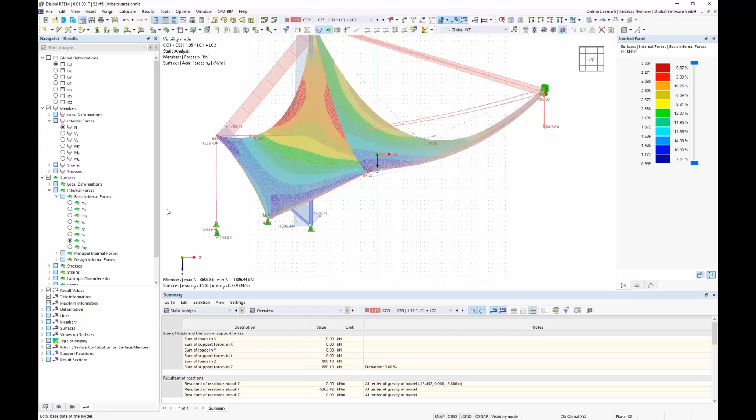And this brings us to the state of how I can check if now membrane and members are so far okay. For this you can activate in the calculation add-ons the option stress strain analysis, and with activation you get here in your table the option stress strain where you can say what should be calculated.

For example, for members we say please check for us, you can select between all these stress components. It's endless and I think also boring. So from my point of view, sigma equivalent is enough, and check it against limit equivalent stress and apply.

For surfaces you also have the same option. Here equivalent stress is not so good, but you can say please check sigma x and y with a user-defined stress, for example 35, and here also use for example 25. So it depends on you what the limit stress is.

And now if you run it, you get here maybe a utilization check for all these elements according to stresses coming from all these stages. So now we get a result.

Of course, now the nice shape of the form-found shape disappears because this is valid for all load combinations from different stages. So the program draws the shape on the original shape. But this is one point. Now you see we get results for members and for surfaces.